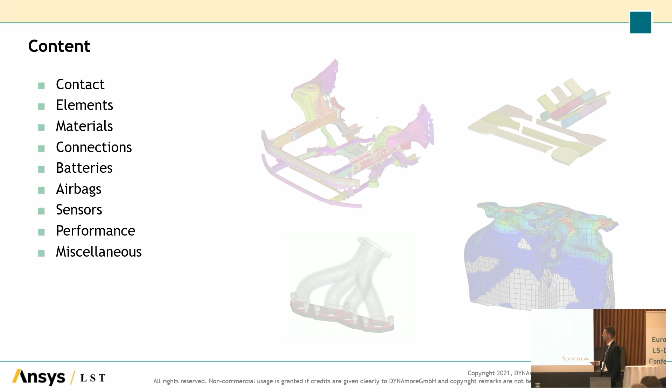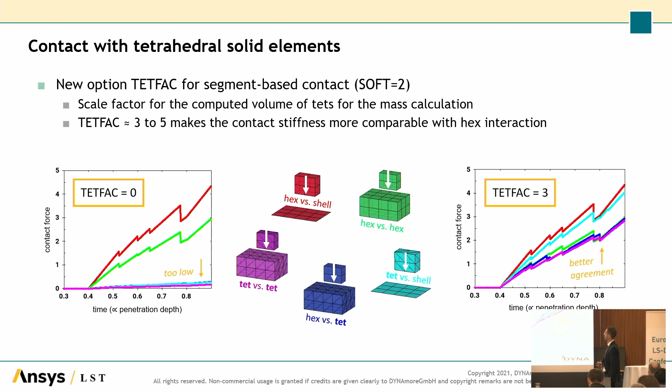So we introduced this new parameter TETFAC, which is a scale factor for the computed volume of TETs for the mass calculation, and with a factor of 3 to 5, you get a much better agreement with the other contact situations here. So that's on *CONTACT card, optional cards.

Next, this is what you already saw this morning. It's a new solid element formulation, type 62. It's a fully integrated 8-node hexahedral element, which is somehow an alternative to the existing element formulations -1, -2, I would say. And the goal with this implementation was also to have a better way to avoid shear and volumetric locking, to have a fast, accurate, and robust element.

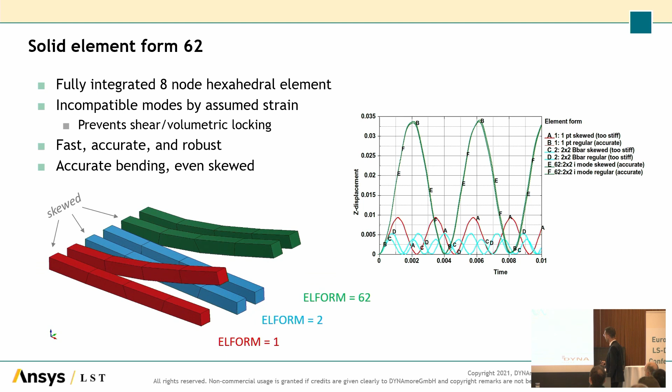Then, for the isogeometric analysis, as Jason already mentioned this morning, there are numerous efforts done to fully incorporate this new method in vehicle crash simulation. So that's the goal, and it will take some time, but the steps are pretty big, especially towards R13 and probably in the upcoming versions as well. So just a few new enhancements.

There's a new IGA keyword family. The mechanical coupling of shell patches to T-joints is done with this tied edge-to-edge keyword. SPR3 is supported, as well as rigid walls. We have the boundary conditions, the Dirichlet and the nodal boundary conditions with these keywords implemented.

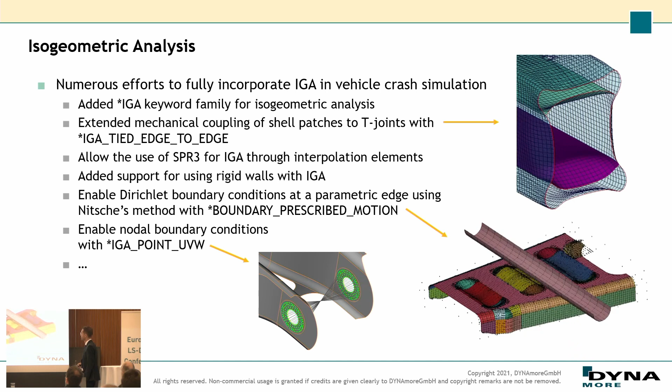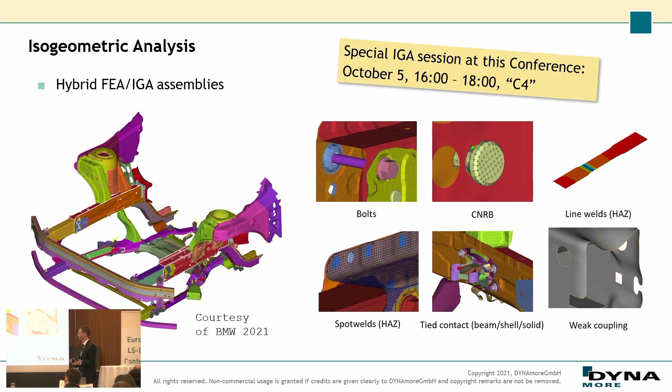And I would like to point out that there is a special session about IGA this afternoon, C4, where you will learn way more about all these new features and enhancements, and the background of this still new method. And Jason already showed that a very nice thing is the idea to take your crash model and just replace a few, maybe most interesting parts by IGA, and then gain some experience with that, and compare with the old approach and so on. So I would like to point out that other session for that topic.

So here another minor new feature which can be found on the section shell, and that is the new option called thick scale. With that, you can scale, as the name says, the shell thickness for all elements of a section, including those with thickness specified using element shell thickness. So that means you have a non-uniform distribution of the thickness, but you can uniformly scale that. So, for instance, that could be interesting for sensitivity studies or structural optimization.

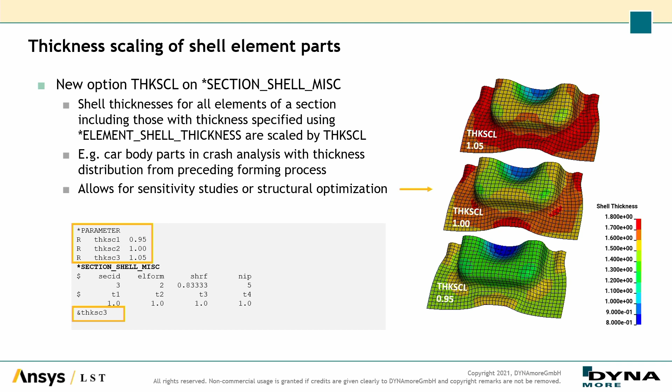So if you have a part in your crash analysis where you get results from a forming simulation before, then you might have such a distribution of the thickness, and with the scale factor, you can just increase or lower this thickness uniformly in this part.

Also, Jason showed this add inelasticity keyword that is already available since R12, but a lot of new features were added in R13 as listed here. So we have some orthotropic field overlay for thermal expansion and failure. There's temperature shifts in hypoviscoelasticity. We have some new hyperviscoelastic laws, support of higher order tetrahedron elements, or Norton-Bailey creep law, as shown in this example.

So as Jason mentioned, the idea of this whole approach is to add a missing material behavior to an existing material. So that could be these ones, but all other standard material models, which we have 300 of, you can add that to. And there's also a paper presented, I think tomorrow morning in session D3, where you will probably learn more about it.

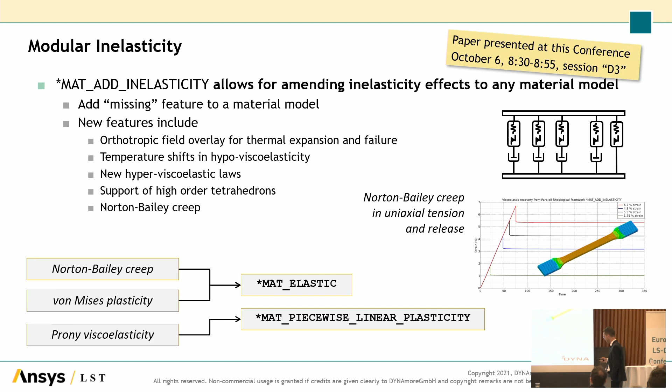Then we have for the DIEM, that's our damage initiation and evolution model, a new possibility to use this so-called FLD or MSFLD criterion also for solid elements.

So initially it was implemented only for shells because it has some assumptions like plane stress in that criterion. But now that was extended to be available for solid elements as well. You will find some mesh restrictions you have to take care about, for instance, about the element, the node numbering scheme and so on, and a few others, and that's described in the manual.

And if you do that, then you will see in a comparison, is there a movie? No. Okay. In a comparison to shell elements, you can see that you get a pretty good agreement, and it's not only available for solid elements now, but also for thick shells.

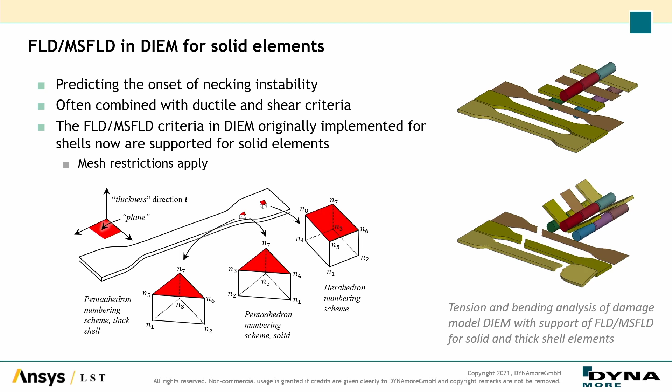Then we have added some nonlinear viscoelasticity to a plasticity model. We started to think about adding that to MAT 24, but we used MAT 123, which is pretty much the same as MAT 24. And there we added this nonlinear viscoelastic model. So it's based on von Mises viscoplasticity.

And now you can define a Young's modulus as a function of an average strain rate, as shown in this picture here. And also you define a constant decay coefficient to represent the viscosity, so this damper here. And that could be interesting for applications where you have polymers involved, where not only the plastic behavior is strain rate dependent, but also the elastic portion here.

And it's a pretty simple approach, so calibration is not that difficult, and you could at least increase somehow the accuracy for materials like that.

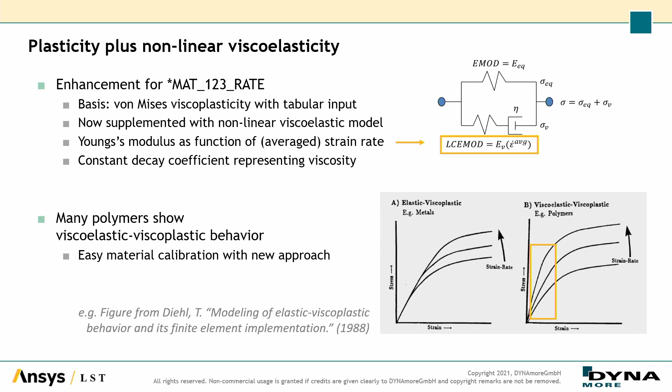Then we have a new material model for composites, MAT 249 crash. So it's for reinforced thermoplastics. And it features a phenomenological approach for softening due to damage and failure. So there's the possibility to have some tabular input data defining damage parameters, which gives much flexibility.

Then we have anisotropic fiber formulation there, where fiber stretch and compression damages fiber and matrix. The fibers can reorient and so on. So that's a material model that's really available for applications such as fabrics, woven and non-crimped fabrics, and for total damage of the material, so element erosion, the matrix as well as the fibers have to fail, as shown here.

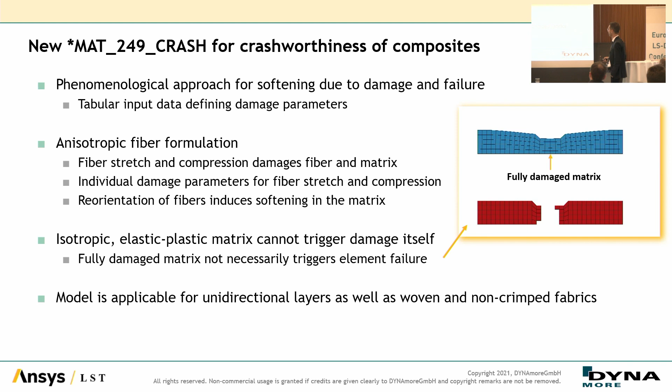So then a few minor material model enhancements listed here. For instance, there is a new strain rate term in MAT Johnson Cook, MAT 15. So you have two or three new parameters there, and this is an approach by Couque. Paper by Couque, and it says that you get better flow stress prediction along the full strain rate range as shown here.

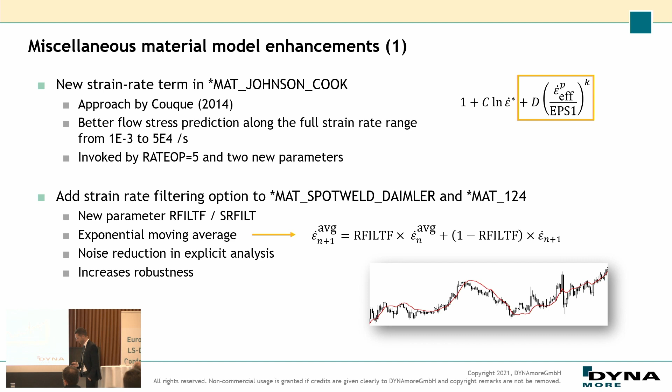Then there's a new strain rate filtering option added to two material models. That's the MAT Spotweld DaimlerChrysler and the MAT 124. So there you can now have an exponential moving average for the strain rate, which should reduce noise in your explicit analysis, and also with that increase the robustness. So that's all based on customer requests.

Then the MAT 251 or MAT tailored properties is an interesting model if you're interested in taking manufacturing factors into account, for instance, from bake hardening processes before or something like that, because there you can define the yield stress as a function of strain and strain rate, so that's like MAT 24, but also two user-defined history variables, and that could be anything, hardness, hardening factor, or whatever. And in R13, this is now available in implicit analysis as well.

Then we added two new options to MAT 224 GYS, generalized yield stress. So you can use this flexible Taylor-Quinney coefficient there, and also the log interpolation. And there is a new regularization option for the DIEM. We already saw the DIEM material model with this FLD criterion for solids.

Another new feature there is now this parameter P5, where you can refer to a curve where you can define a regularization factor versus the element size. So it's similar to the LCREGD curve in GISSMO. So to reduce mesh sensitivity, so that you only need one material card for all kinds of different mesh sizes.

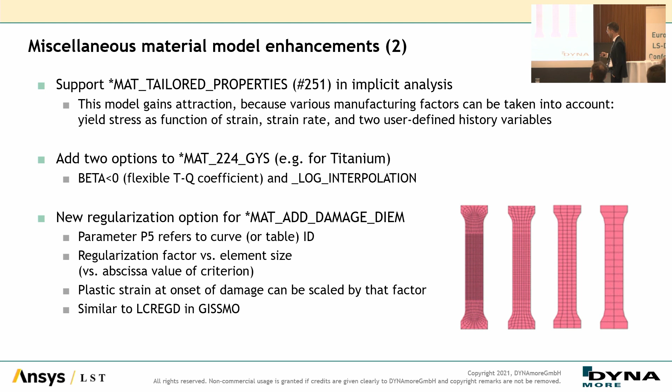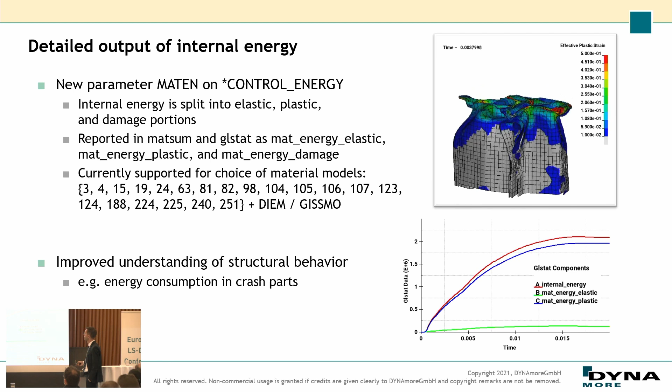Then that was also on Jason's slide. We have the possibility now to split up the internal energy that comes from the material models into elastic, plastic, and damage portions. And that is implemented for a number of material models and also the damage and failure models. And it should improve the understanding of structural behavior, for instance, energy consumption in crash parts as shown here. And as you can see, most of the energy is plastic and a little bit elastic.

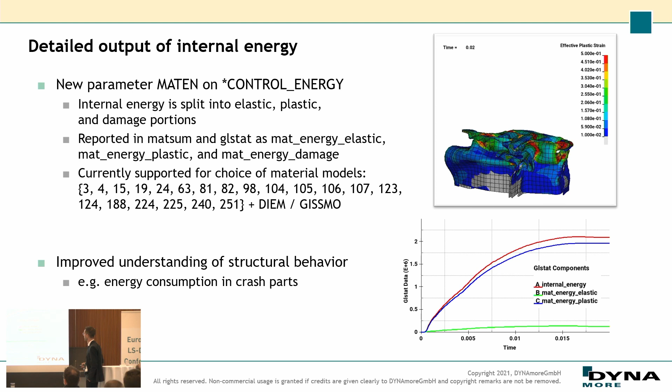You have to take care of the syntax somehow, but then it could be interesting. Maybe it's not yet really supported in preprocessors, I think, so that's kind of new, and we will see. But we have a conversion tool from the old format to the new format, because all that transformation is just done in the keyword reading phase.

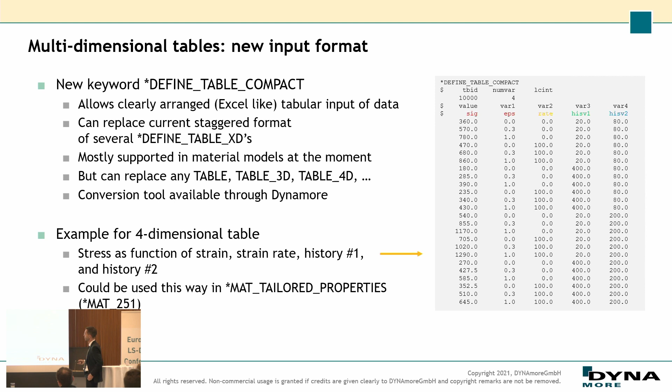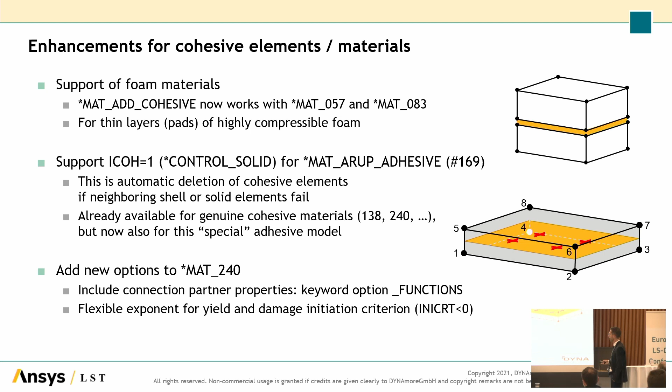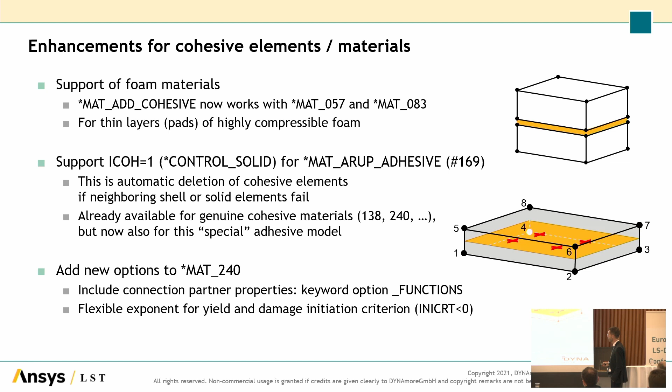Then we have some enhancements for cohesive elements and materials. We are now supporting foam materials, which is done via the MAT add cohesive. So now you can use MAT57 and 83 with cohesive elements. There is a special option for the deletion of neighboring elements, which is now supported for the MAT Arup adhesive, and for the popular material MAT240 for cohesive elements, we have added two new options, which are the functions and also a flexible exponent for the yield and damage initiation criterion.

Then, also new: if you want to model gaskets, we now have the possibility. To do that, you have to combine this new material cohesive gasket 326 with the cohesive elements and the GASKETT parameter on section solid. The GASKETT corresponds to the gasket thickness to represent the membrane behavior. And for the out-of-plane behavior, you can define loading and unloading curves.

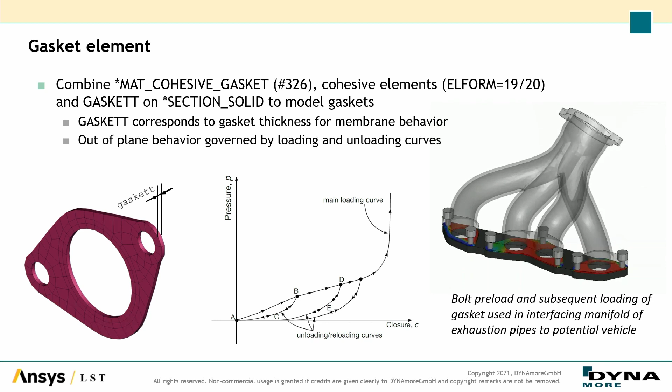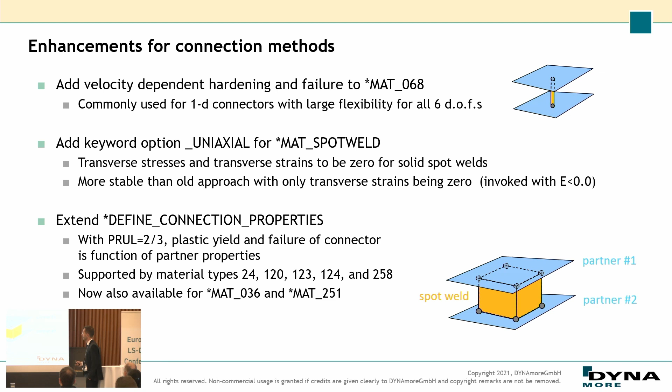More enhancements for the connections. There is some velocity-dependent hardening and failure for MAT68. There is a new uniaxial option for MAT spot weld to deal with some stability issues. And define connection properties is now extended for new materials. I will skip that because I'm running a little out of time.

Then for the pointwise connection of solids, we now have the possibility to use SPR2 to do that. For a long time that was only working for shell elements, and now we extended it to be able to connect solid elements, and that will also come for SPR3 in the next release. That could be quite interesting as people use more and more solid elements in crash as well.

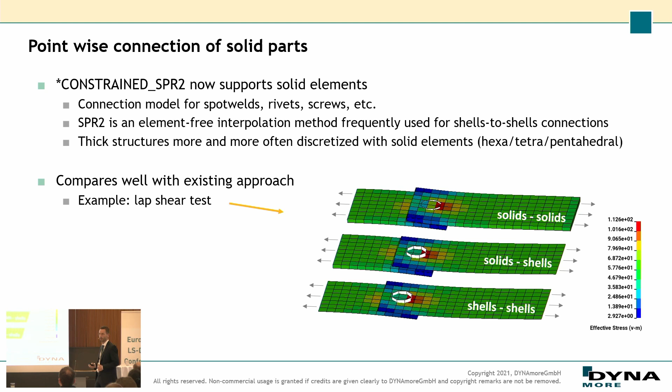For batteries, Jason already mentioned all kinds of new features were added, maybe for the use of batteries in crash analysis. To mention only one of them, there is this erosion capability now added to the BatMac model. With the removal of these elements, the Randles circuits are removed, and also internal short resistance is switched on for the surrounding.

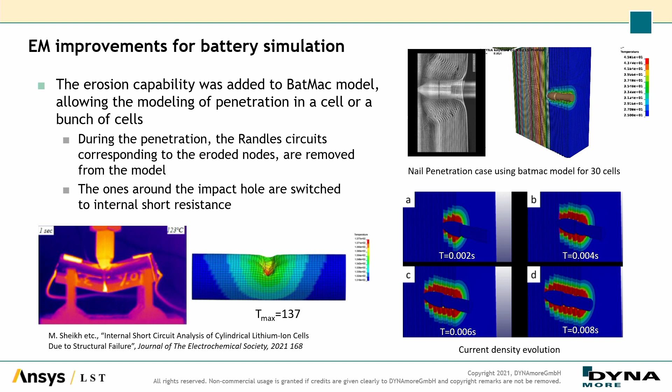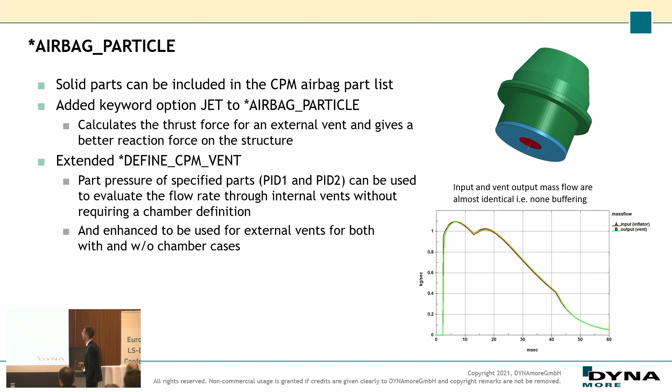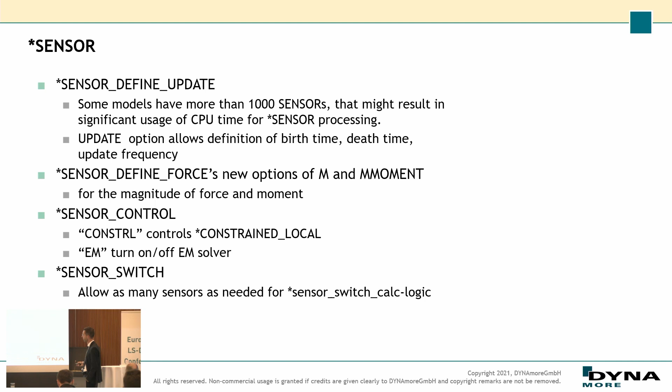Sensors: we have a new keyword, sensor define update. The idea is to define birth time, death time, and update frequency there, so that if you have a lot of sensors, you reduce the CPU time. We have new options, M and moment, on sensor define force. We have new control entities on sensor control for the electromagnetic solver, for constrained local, and the sensor switch is also something new.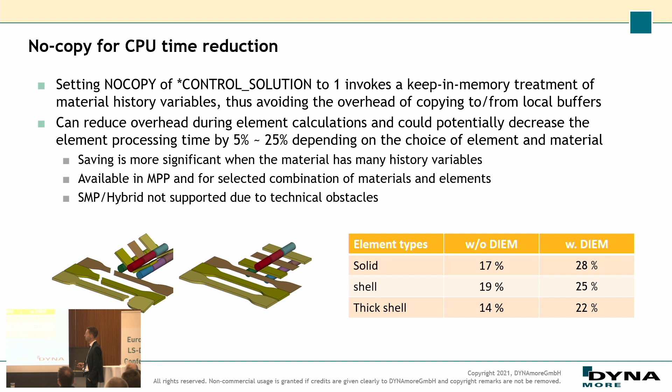And that could be an interesting new option, the so-called no-copy option to reduce CPU time. The problem is that the copying of material history variables was not done very efficiently. That is now totally avoided by keeping it in memory, and that can reduce the element processing time by 5 to 25%. In a full crash analysis, if you use MAT24 a lot, then it could reduce your total CPU time by, I would say, 5 to 10%. So that's on control solution.

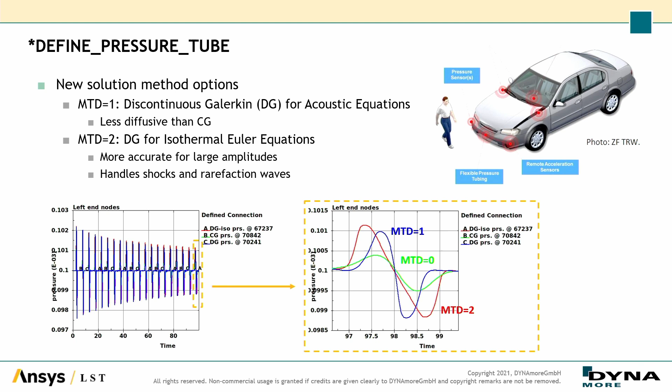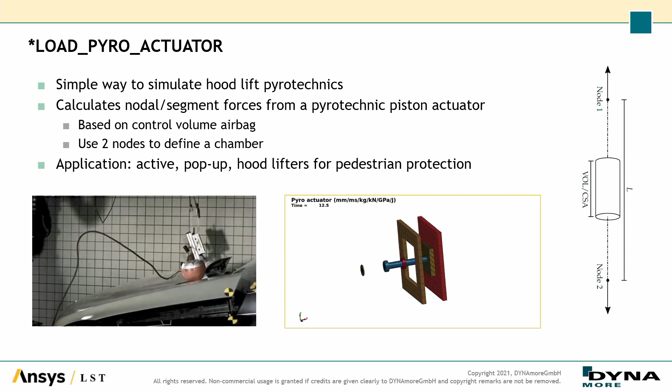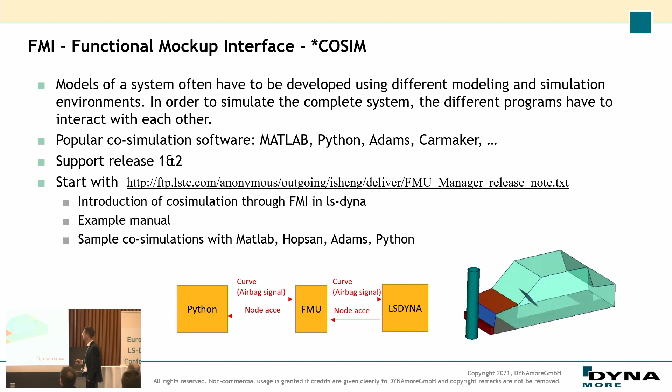And that brings me to the conclusion, where I just say there is way more in R13. I picked just some items from the crash-relevant topics. You will find a more comprehensive list of enhancements in the release notes, and the manuals will be there soon as well. Thank you.